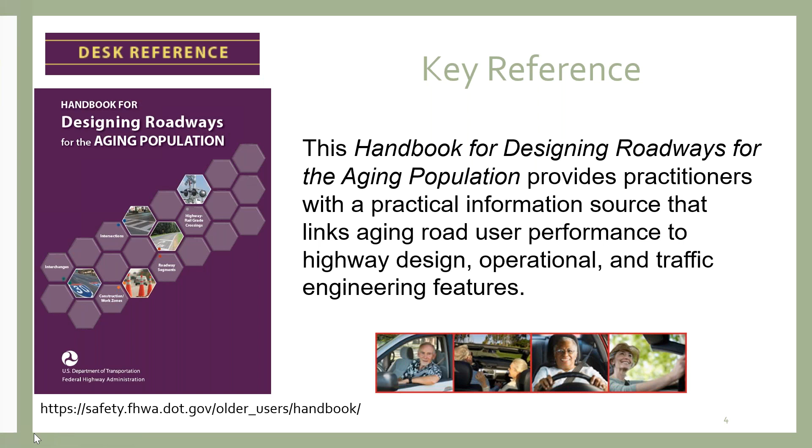Now, why the attention focused on older users? Well, we are an aging population. You may have heard the term the gray tsunami - demographically, the numbers and percentages of older people in America will continue to increase. The number of Americans age 65 and older is projected to double by 2060. So if you think about the older user, or what would be a representative user of our system, maybe a design user, what capabilities of a typical human being are appropriate to assume for certain roadway or pedestrian design criteria.

As we age, that older user would be more appropriate to be our representative person that we design for. And this is a particular issue in Ohio.

If we look at the Ohio State Strategic Highway Safety Plan, older users is identified as one of the emphasis areas. People age 65 and older represent the fastest growing segment of drivers in Ohio as well as nationally.

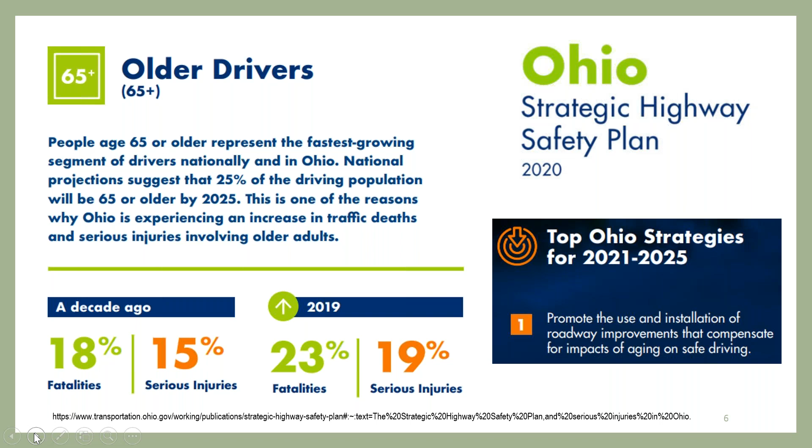So in Ohio, one of the top strategies identified in the Strategic Highway Safety Plan is to promote the use and installation of roadway improvements that compensate for impacts of aging on safe driving. That's really what this workshop is all about. We're delighted to present this workshop through Ohio LTAP to help support this strategy in Ohio's Strategic Highway Safety Plan.

So there is good news if we think about older drivers collectively. Older drivers tend to be safe drivers in terms of not demonstrating risky behavior. In other words, older drivers tend to not speed as much, tend to not be under the influence of alcohol, and tend not to be aggressive drivers.

So across the spectrum of age groups, we actually see where drivers 65 and older are best represented in terms of not being involved in crashes. In terms of driver involvement rates per 1,000 licensed drivers, the 65 and over age group has the lowest involvement in crashes. Good news.

However, the not so good news is that when older drivers are involved in a crash, the outcome tends to be more severe. Part of this is the fact that as we age and our bodies get more frail, the ability to withstand crash impacts becomes less so. The physical damage to the human body will increase as we get older.

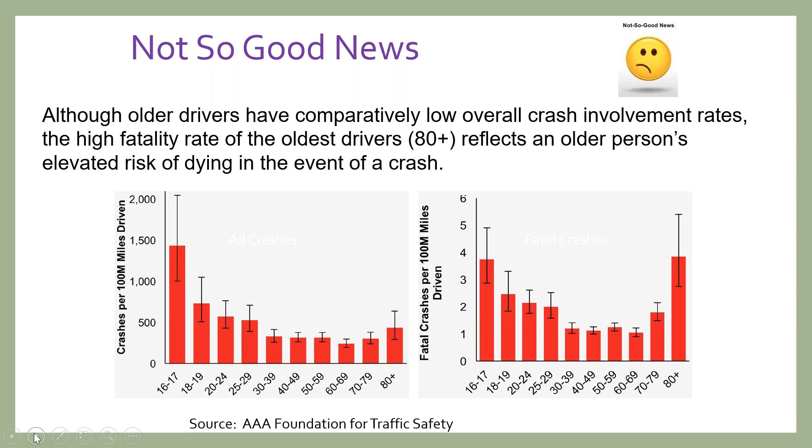So sadly, we do see fatal crashes overrepresented as we get older, especially for the 80 and above. So the good news, older drivers tend to be safer drivers. The bad news is that when older drivers are involved in a collision, the outcome will generally be more severe.

At ages 80 and above, we see that sharp increase in the fatality rate, and mostly that would be expected just because at ages 80 and above, we would tend to have more underlying health conditions. It's more difficult to recover from a serious crash the older that we get.

By 2050, that older population of say 80 and above will be nearly 3 times more than what it currently is. So not only are we aging, but very gladly, as people see more and more birthdays, it's not uncommon to see that 85th birthday and higher. Many people enjoy good health and continue to drive, but we do start to see that increase in fatalities at that older level.

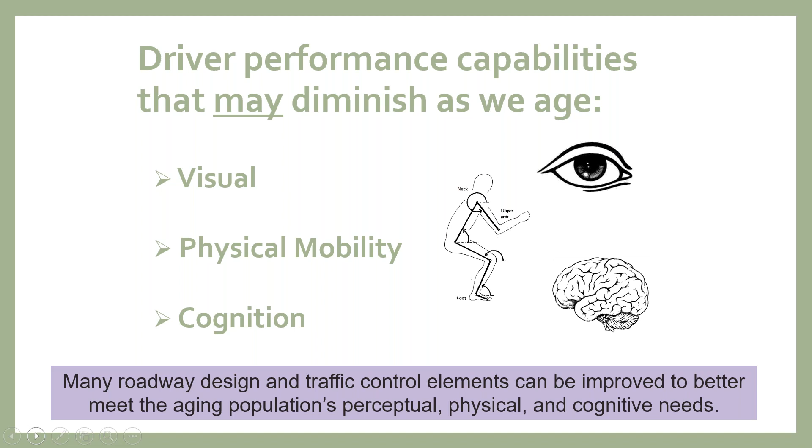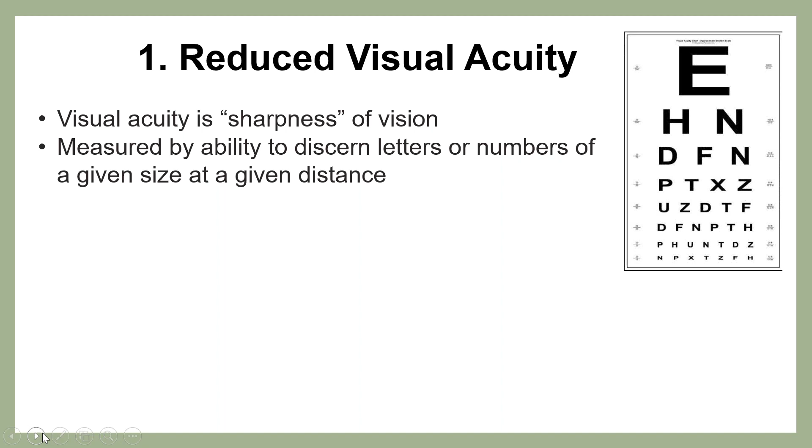Starting with visual capabilities: reduced visual acuity, reduced contrast sensitivity, reduced area of visual attention, reduced perception in motion, increased sensitivity to glare at night, and decreased dark adaptation. These are six very common visual capabilities that typically diminish with age. Visual acuity is the sharpness of vision - think about a typical eye test or an eye chart where we ask someone to discern the letters or numbers of a given size at a given distance.

Where visual acuity or reduced visual acuity comes in for us as transportation practitioners, well, the way we communicate to drivers is through signing, whether it's a warning sign, guidance sign, or regulatory sign. That's primarily how we communicate, although as we get more in-vehicle navigation systems, that helps with the guidance task. But no doubt for things like traffic control, we communicate through signing. Reduced acuity makes it more difficult for people to perceive the details on those signs, so things like larger letters and larger signs are obviously a way to help compensate.

Reduced contrast sensitivity is the ability to distinguish between objects of similar color or shading, and distinguish the object from its background. If you think about pavement markings, worn pavement markings can be problematic for someone with reduced contrast sensitivity to make out. Or think about the edge of a roadway, a curb, and identifying where the road ends and the curb begins, not wanting people to hit the curb, plus issues with shadowing. If we have trees that create shadowing effects, it can make it more difficult to identify the edge of a curb. Reduced contrast sensitivity can also make things seem fuzzy or ill-defined.

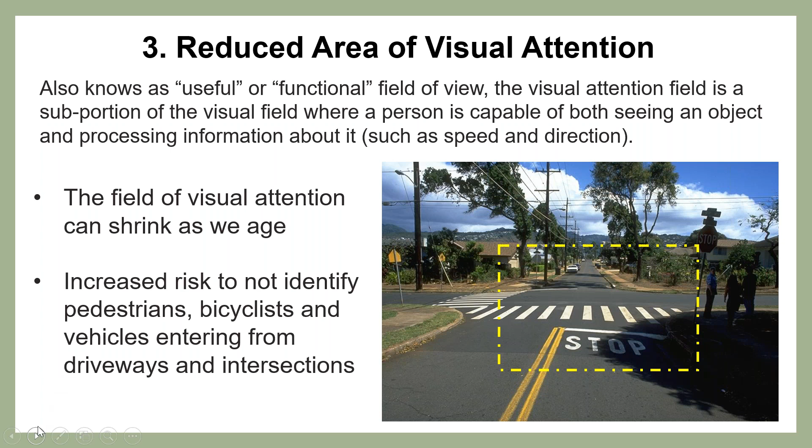If you think about perceiving a pedestrian on the side of the road, perceiving that there is motion, that the person is actually moving, that field starts to narrow down. Also, the cone of vision we need to actually see detail, like reading a sign, is an even narrower cone, and that also diminishes over time. So as drivers, the full horizontal view, that 180 degrees of peripheral vision, isn't very useful to us in the driving task. Actually, it's the useful field of view that is where we could pick up motion, such as a pedestrian. Then the accurate vision field of view is where we would have to focus our eyes to read a sign, and that is a very narrow field of view.

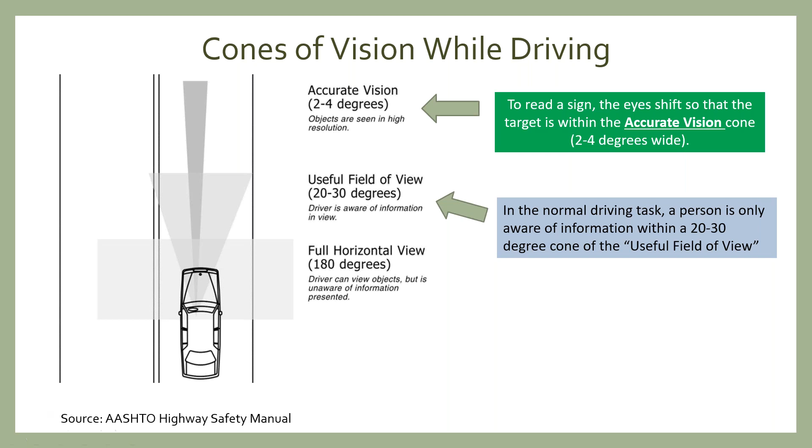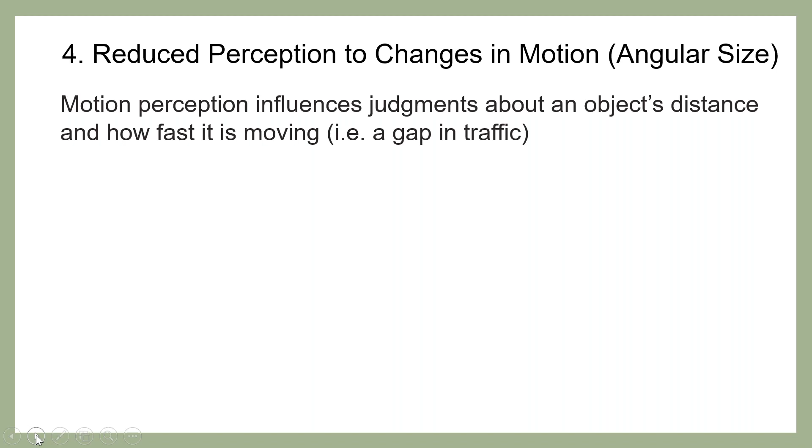When we are focusing our attention to read a sign, we tend to lose what we are capable of perceiving, even within the useful field of view. If we're concentrating on reading a sign, the other things around us, like maybe a pedestrian or a bicyclist, become harder to notice, especially as we age, since these cones of vision start to diminish. Motion perception is our ability to judge, and this is typical if we think of being at a stop-controlled intersection waiting for a gap in oncoming traffic, maybe making a left turn from a minor street or coming out from a driveway. We have to make a judgment about the speed and distance of that approaching vehicle, to decide whether there's an appropriate gap to make the left turn or crossing maneuver.

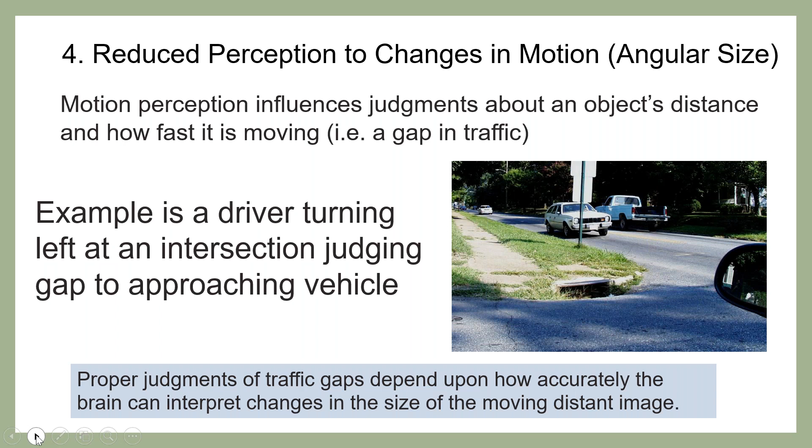That judgment and gap really is based upon our brain's ability to interpret a moving vehicle. We do that by the perceived difference in size, the vehicle appears to get bigger the closer it gets. This is applicable to all ages, not just older drivers. It's a challenge even for younger drivers because we don't perceive much difference in the size of the vehicle until it gets very close to us. From 1,000 feet to 500 feet, that vehicle image size doesn't get much larger. Then at less than 500 feet, we start to notice the image appears bigger, and that allows us to judge its relative proximity to us.

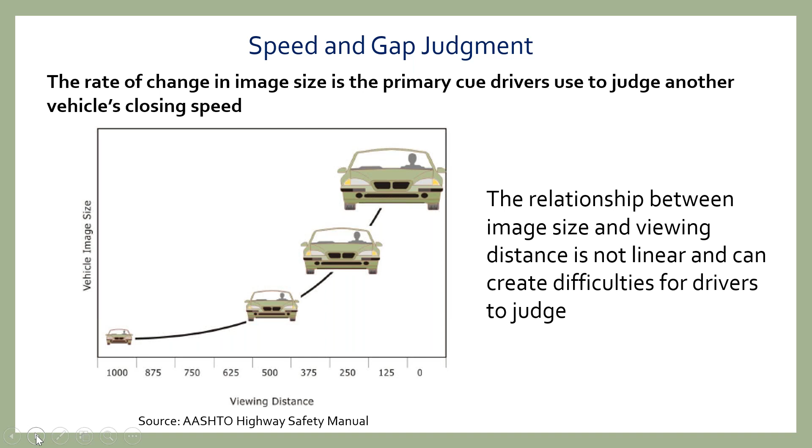As we age, that ability to distinguish those slight differences in image size becomes even more challenging. There's also increased sensitivity to glare at night, especially in the rain, from headlights of oncoming traffic, and our eyes need more time to recover from that interference with our focal vision. The sixth visual ability that diminishes is moving from light to darkness. Our eyes, the retina, need time to adapt to the change in lighting condition, and that ability to adapt also diminishes with age.

So those are six examples of things that diminish with age. When we do this workshop live and in person, one of the activities I like to walk through is this one. We'll do a little activity individually. I'm not going to pull up a poll pod, but I'd like you to think for a moment.

We've got a list of various safety enhancements that are very typical: putting in roadway lighting, implementing a protected-only traffic signal phase, using larger signs, larger letters, high quality reflective pavement markings, overhead mounted lane assignment signs, no right turn on red, and signal backplates with retroreflective borders. These are things we commonly do.

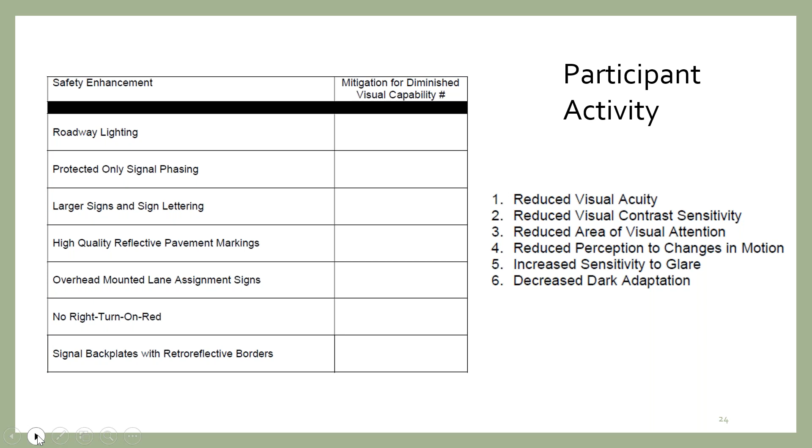Now I want you to think about how those safety enhancements might help compensate for one or more of the six visual capabilities that are diminished. If we went through this as an exercise, you'd see that sometimes multiple capabilities are mitigated by these various safety enhancements.

So a lot of these common things we do help compensate for the diminished visual abilities that are normal with the aging process. There are some physical mobility capabilities that also diminish. We tend to lose strength and range of motion in our shoulders and legs, affecting our ability to turn a steering wheel and apply the brake in a rapid manner, or reduced head and neck or upper torso flexibility.

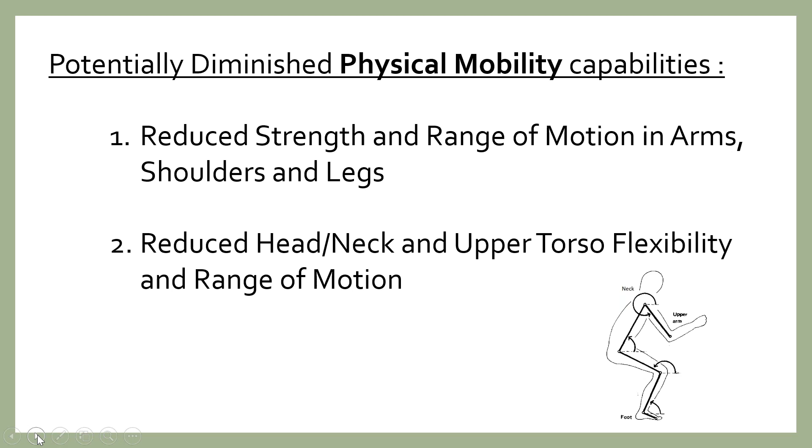At an intersection, perhaps our ability to turn our neck to judge a gap in oncoming traffic, or to make a right turn on red, is affected. We commonly have to turn our neck or upper body, torso, in the driving act, and that can become more challenging as we age. So the ability to make turns, use the steering wheel, or shift the foot from accelerator to brake, or apply appropriate pressure to the brake, these are all things influenced by reduced strength.

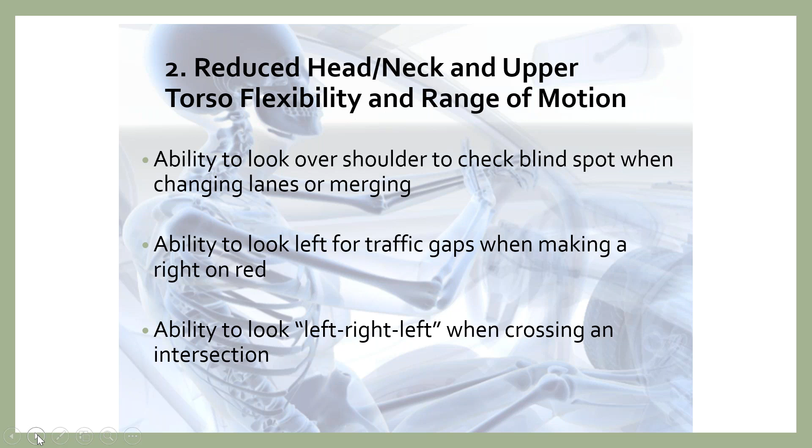For head and neck upper mobility, looking over the shoulder to check blind spots, looking for gaps in traffic, and pulling out of an intersection - the look left, right, left - or as a pedestrian crossing the street, same thing, to judge gaps to cross the street.

One of the things I really miss about not doing this workshop in person is an activity we'd do at this point to help participants better understand those diminishing abilities. We would sometimes pass out neck braces to represent that loss in upper torso mobility, and hand out glasses to mimic things like reduced visual acuity or contrast sensitivity. There are filters that can replicate conditions like various sight issues, something as simple as blurring or clouding of the eyes.

So just wanted you to take a moment to better appreciate why older drivers sometimes behave the way they do. Sometimes it's explained by these reduced physical and visual abilities. There are cognitive abilities as well: diminished selective attention, increased perception and reaction time, and diminished working memory skills. Selective attention, especially at intersections in the driving task, requires us to pay attention to a lot of different things.

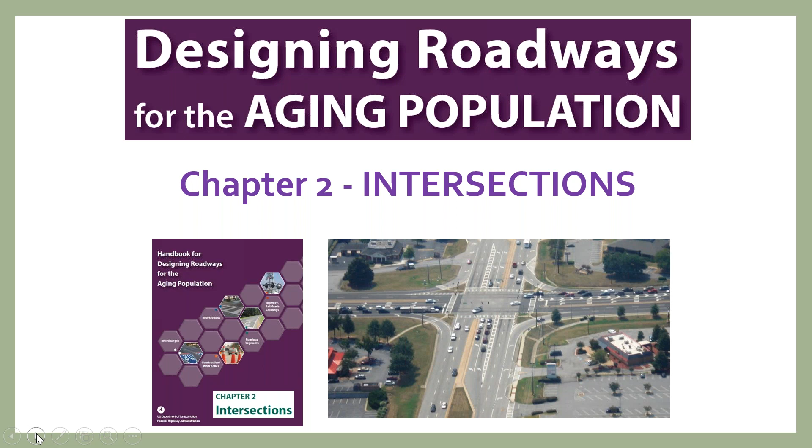So let's dive into the FHWA handbook. Intersections represent a big chunk of what is in the handbook, because intersections are particularly problematic or challenging for older users. So let's first try to understand why intersections are such a challenge, and then look at the potential treatments that can be used.

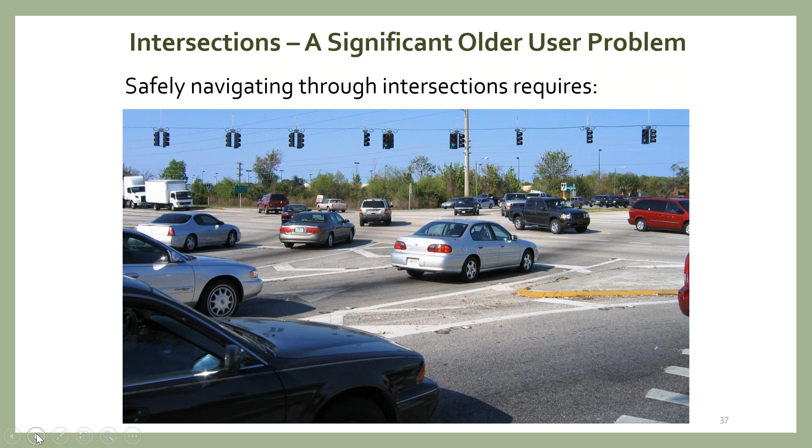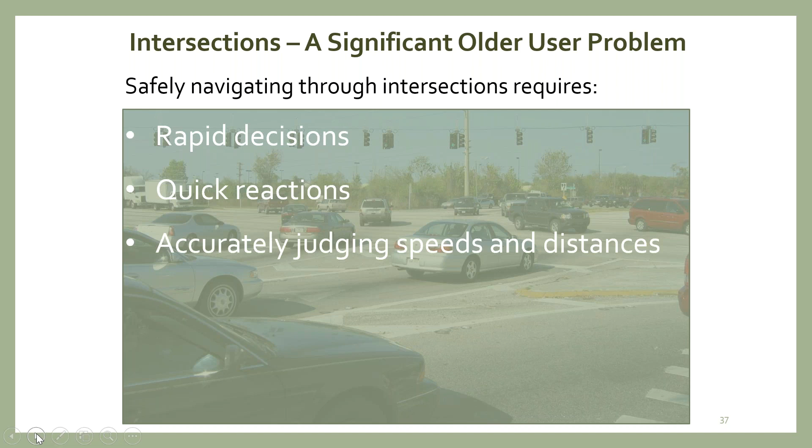Intersections are challenging for all users. They require a lot of decisions. They require us to make actions or maneuvers, and sometimes even evasive maneuvers. We have to follow traffic control devices. We have to navigate perhaps through a choice of multiple lanes, depending upon whether we're going right, left, or through, or sometimes we even have multi-legged intersections. So oftentimes we have to make rapid decisions. We have to have quick reactions. We have to make accurate judgments of speed and distance.

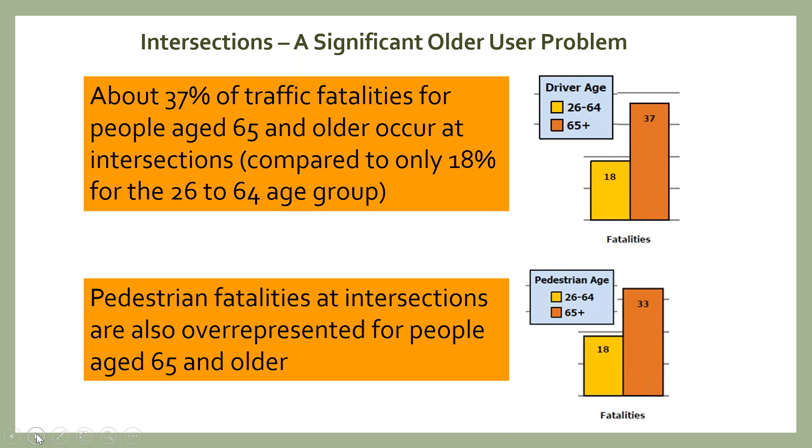And all of these are abilities that can commonly diminish with age. So if we look at the data, about 37% of traffic fatalities for people age 65 and older occur at intersections, compared to about 18% of the general population, or the under-64 group. So traffic fatalities at intersections are statistically overrepresented within the 65 and above group. And that sadly is the case for pedestrian fatalities at intersections as well—pedestrians 65 and older are overrepresented at intersections.

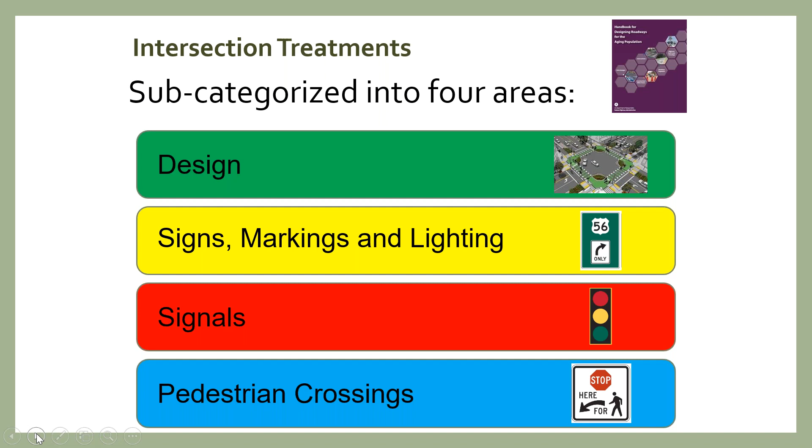So we're going to talk about treatments identified in the handbook, and I'm going to subcategorize them a little differently from how they're categorized in the FHWA handbook, but I think this is an easier way to think about them. We'll talk about design types of treatments—things that might be done as a project is developing, involving physical construction with the intersection. Then there are treatments that involve signing, marking, and lighting—things that might not need a project, that could be done at lower cost, possibly even implemented by maintenance forces. If the intersection is signalized, there are some things that can be done specific to the traffic signal operations. And the fourth category involves pedestrian crossings at intersections.

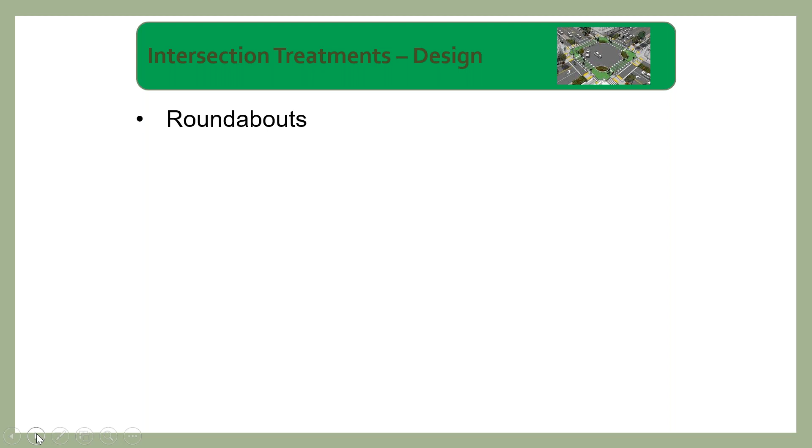The design treatments covered in the handbook are roundabouts, reduced left turn conflict intersections, minimizing the skew angle if there is one, utilizing an appropriate curb radius at the intersection, and the use of raised channelization, as well as having ample intersection sight distance for those permissive type of maneuvers.

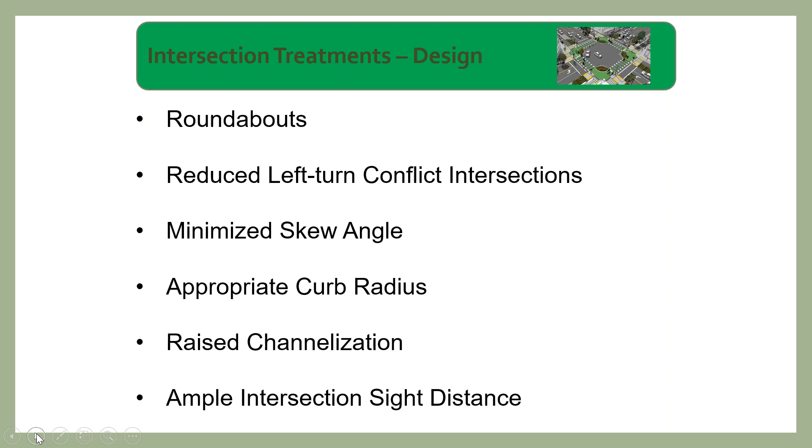So let's start off with roundabouts. The handbook does recommend that roundabouts be considered in the implementation or redesign of existing intersections. Roundabouts are very effective at eliminating those severe right angle crashes. Compared to a traffic signal or a stop-controlled intersection where someone runs a red light or blows through a stop sign, that would result in a 90-degree collision at a high speed.

Under the safe system approach, we better understand that from a kinetic energy management perspective, not only is speed part of the kinetic energy that is transferred to the body in a crash, but the angle of the impact. So for two cars colliding at an intersection, we actually have less protection from our vehicles if we're impacted on the sides.

If you think about getting hit on your driver's side door or passenger side door, there's less steel, less metal, compared to what would be absorbed by the vehicle body in a rear end collision or even a head-on collision, even though a head-on collision typically involves two vehicles at high speed. It's actually the part of the car that gives us the most absorption of kinetic energy through the front crumple zone area. So yes, it's a higher impact energy, but it's also where the vehicle gives us the most protection.

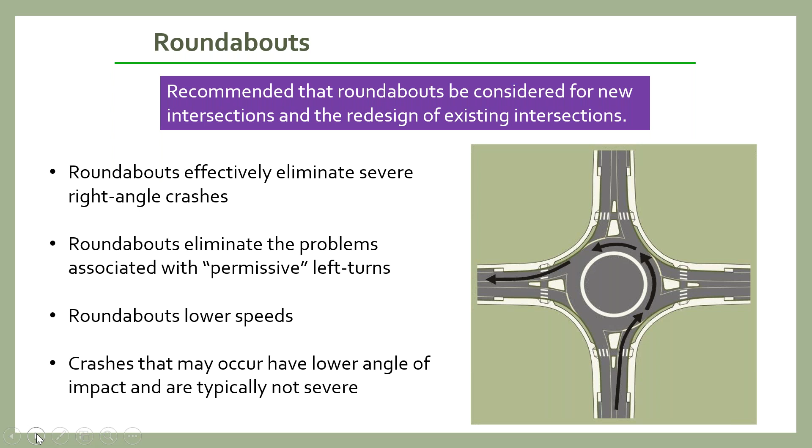Not only are all of these things consistent with the safe system approach, but they are also very consistent with how we can design and operate intersections with the older user in mind. All of these advantages are particularly advantageous to older users. For a pedestrian, the pedestrian only has to cross one direction of traffic at a time.

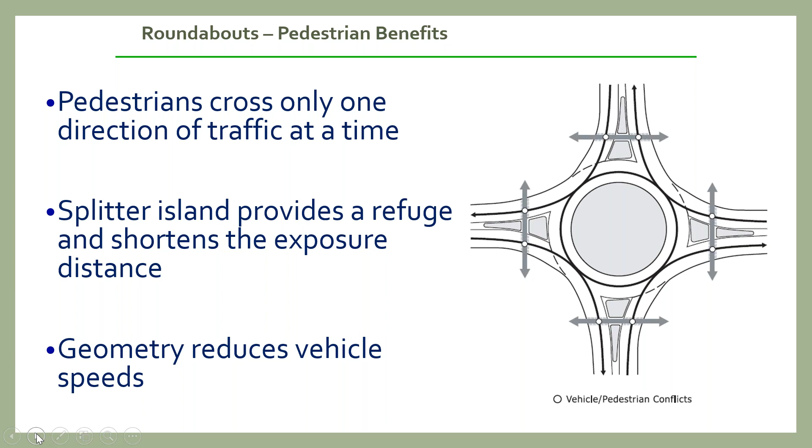The splitter island can provide a refuge and shorten the exposure distance for the pedestrian crossing. And as we mentioned, the geometry of roundabouts typically reduces vehicle speeds, increasing the likelihood of yielding to pedestrians, but also lower speeds increases the survivability of a crash if a collision occurs.

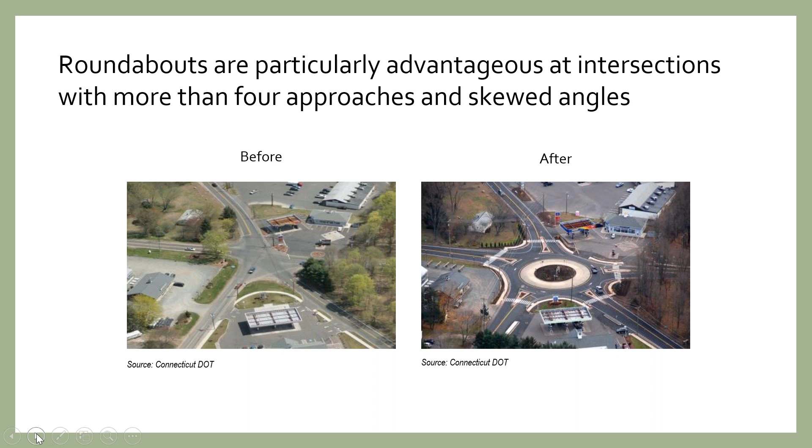Roundabouts are particularly advantageous when we've got skewed intersections or intersections with more than 4 approaches. Roundabouts are always great choices when you're trying to deal with these complex geometry type intersections.

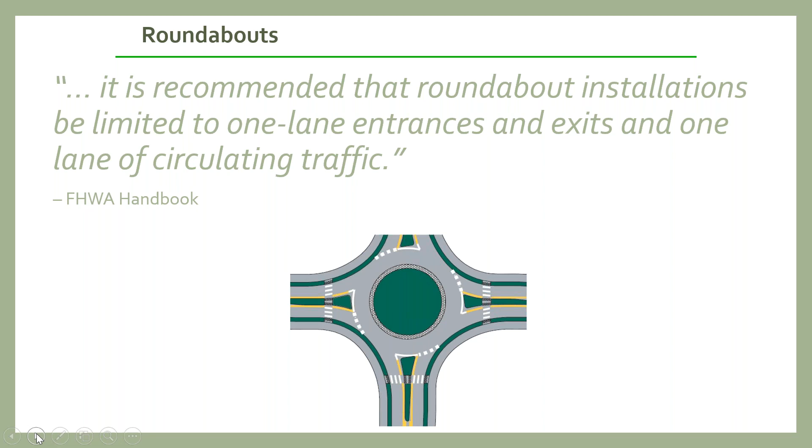Now, the handbook does have a recommendation that roundabouts be limited to single lane roundabouts, one lane entrances and one lane of circulating traffic. Well, why? What's the issue with multi-lane roundabouts? Multi-lane roundabouts are more challenging for motorists, certainly starting with the key decision of what lane should I be in.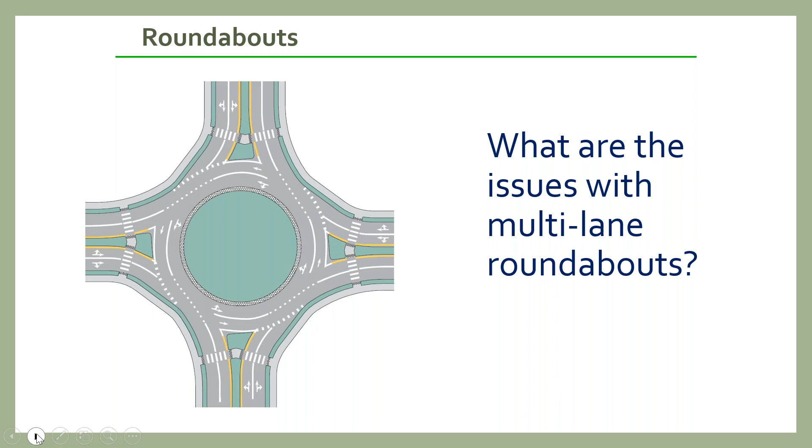If it's just a 2-lane roundabout, it's really a choice of right lane or left lane. But even with good signs, good markings, there are still some challenges that we see at multi-lane roundabouts that we don't see at single lane roundabouts. We've basically opened up an opportunity with multi-lane roundabouts for more errors to occur.

Things like on entry to a multi-lane roundabout, the entering driver needs to yield to both lanes. And sometimes, especially when the entry approach and the exit leg of the roundabout have a larger separation distance between the entry and the exit, it can be confusing that the driver in that inside lane, say the left lane in the circulating roadway, may be exiting.

And for most 2-lane roundabouts, it is very common where the 2 through lanes are permitted to make the through maneuver. A left turn made from the left lane, right turn made from the right lane, but very commonly the 2 lanes allow for the through movement. So that white car in the figure there on the left may be making that through movement, maybe they entered from the top approach, and the yellow vehicle is not yielding to both lanes. So we see those types of problems, not yielding to both lanes.

We also see on entry, and the geometry of the roundabout may or may not contribute to this, but the appropriate entering path - a vehicle in the right lane on the entry should enter the circulatory roadway in the proper receiving lane, but sometimes drivers cut into the improper lane of a multi-lane roundabout, failing to maintain lane position. Or people make an improper maneuver in the circulating roadway, say, for example, a driver that is essentially making a left turn, but doing so from the right lane of the multi-lane roundabout - an improper left turn.

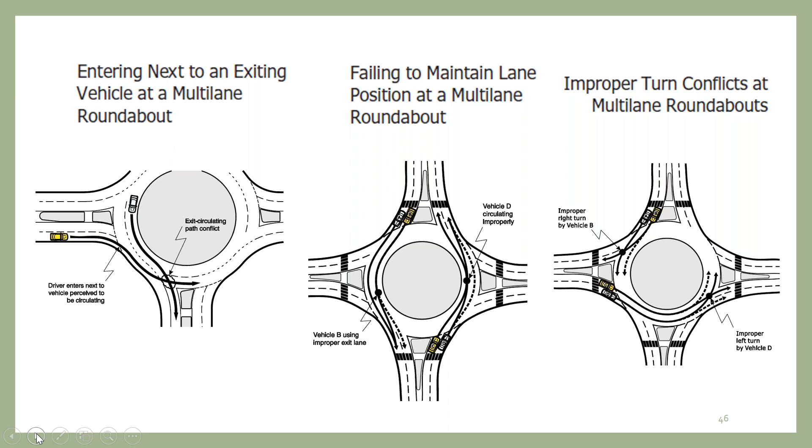So that recommendation is in the handbook, but I don't want to be too negative or discouraging about multi-lane roundabouts. Yes, multi-lane roundabouts have these potential challenges, these crashes can occur, but the good news is they tend to be less severe.

And there are things that are emerging with multi-lane roundabouts: the spiral design, turbo roundabouts that introduce a raised feature separating the lane lines in a multi-lane roundabout. These are emerging things on multi-lane roundabouts that may actually help improve safety performance down the road for multi-laners.

So with roundabouts, I guess the rule of thumb is less is better in terms of number of lanes. Fewer lanes generally means better safety performance. So when designing roundabouts, think in terms of if we don't need the extra capacity right away, maybe we're designing for a future condition, making the roundabout expandable in the future, but opening it up and operating it based upon your current needs.

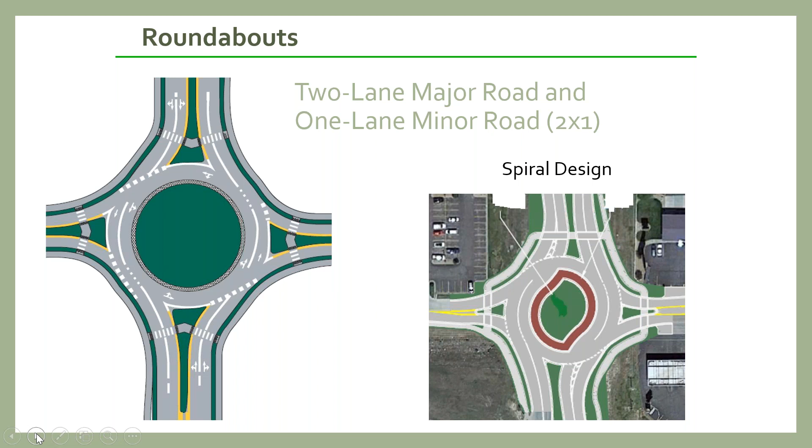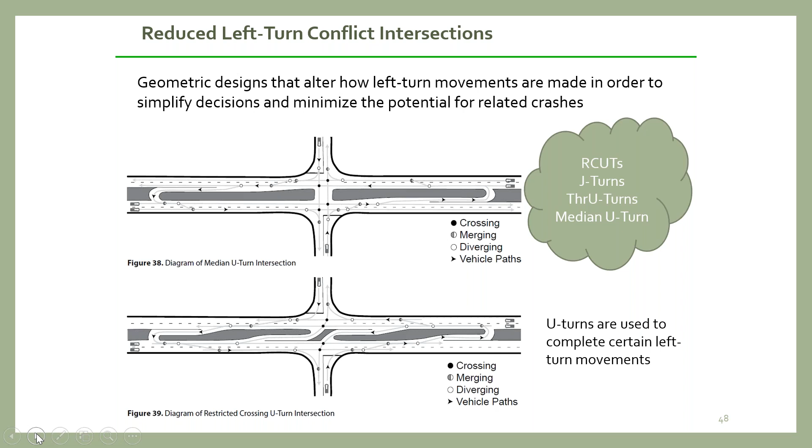So roundabouts, reduced left turn conflict intersections, the other geometry - these are things like the restricted crossing U-turn intersections, the median U-turns. They basically redirect left turn movements at the main intersection. We talked about the problems of left turn maneuvers. Well, these are also ways to help mitigate those left turn problems.

If we think about a traditional open median type intersection, especially in a rural area on a divided highway where the major road does not stop and the minor road has stop control, it's inevitably those far side angle collisions that we see as the problem on these types of rural intersections.

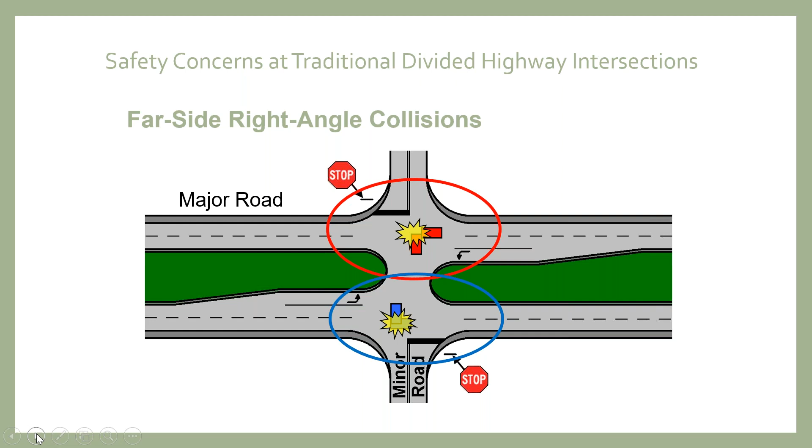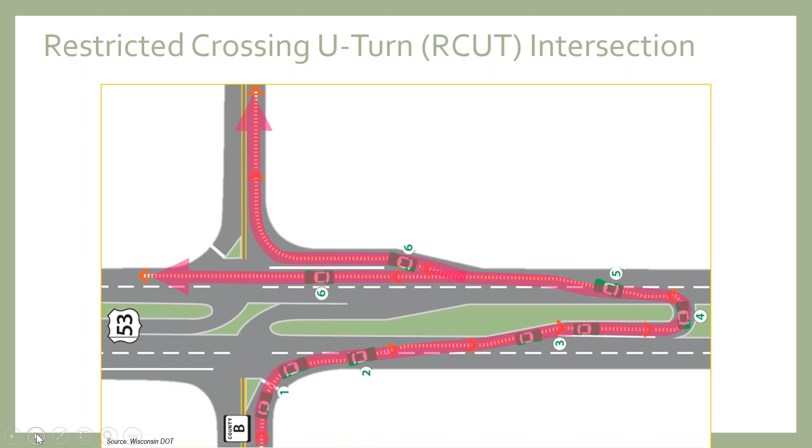As motorists, we do a better job of judging gaps on the near side, less so on the far side. That's where the restricted crossing U-turn, also known as a J-turn, comes into play. Traffic coming out of the minor street makes a right turn, goes to the downstream location, makes a U-turn, and if they wanted to make the left or crossing maneuver, they do so by continuing straight or making the right turn. It basically breaks up the decision points, making it easier to judge gaps or view oncoming traffic one direction at a time, making one decision at a time.

Things like the restricted crossing U-turn can be particularly advantageous to the aging population. For RCUTs and median U-turns, the Federal Highway Administration has some great informational guides available from our FHWA intersections webpage on these reduced left turn conflict intersections.

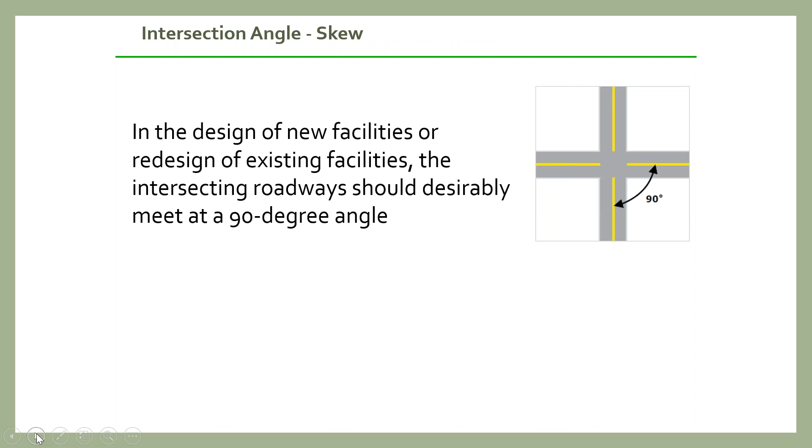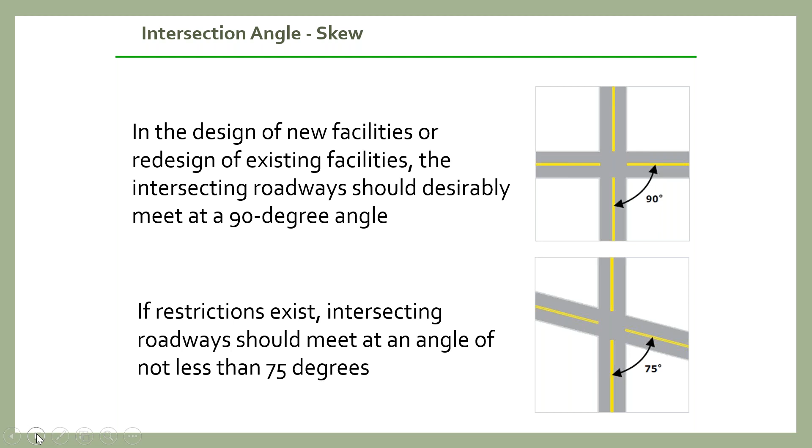For skew angle, most intersections have a 90-degree crossing, but not all intersections have that. Sometimes we have a skew, and that skew can be problematic. Typically, if that angle becomes less than 75 degrees, 90 degrees being the ideal, that's when the skew can be problematic.

The skew angle can necessitate greater neck turning in order to judge traffic coming from the left direction. It may increase the length of a crosswalk, making it more difficult for a pedestrian to cross. It may also reduce the ability of a pedestrian to see drivers, especially drivers that may be looking the other way for a gap in traffic.

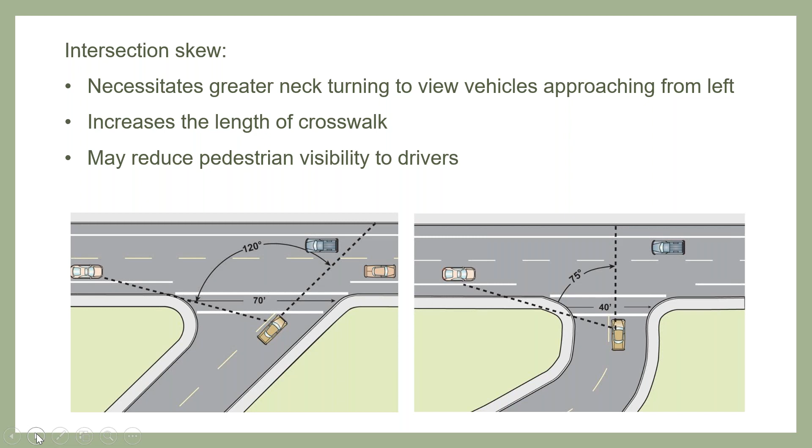So this would be, say, a stop-controlled minor intersection. That skew angle does have a direct influence on what could be called the head turn angle - what would be required of a driver to look to their left, over their shoulder, to see approaching traffic. When the intersection skew angle is less than 75 degrees, that's when the head turn angle would start to approach 140 degrees.

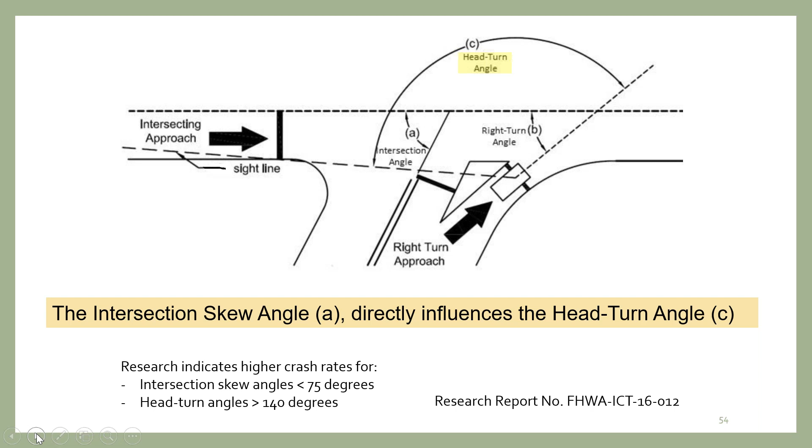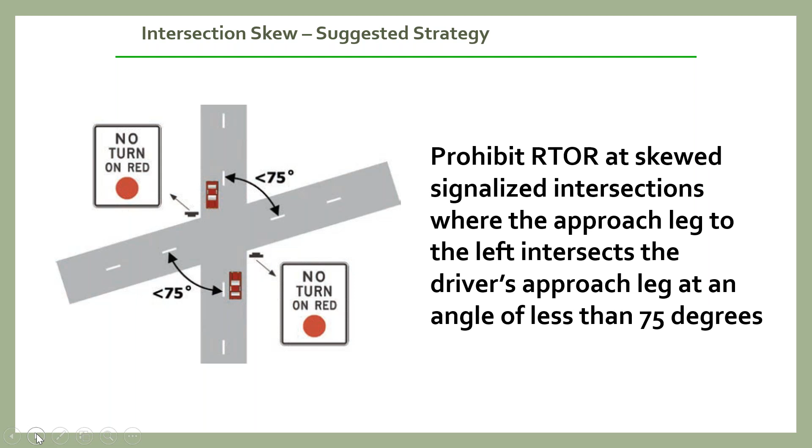That can be particularly challenging. So some things can be done if we can't eliminate the skew, and obviously a lot of existing intersections have skew, so you're probably not going to have an opportunity to change the geometry. Things like eliminating the turn on red at a signalized intersection - make it a no right turn on red.

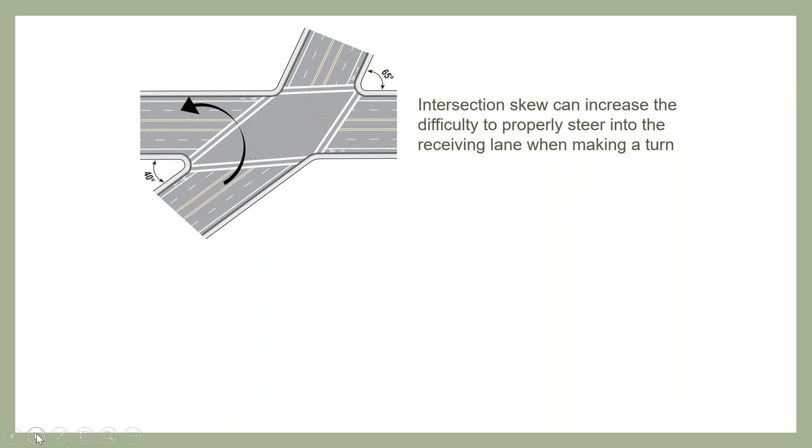Another challenge of a skewed intersection is for drivers making a turn. In this illustration, you can imagine how difficult it might be to make that left turn - it's a hard steering maneuver to make at the intersection. One of the recommendations in the FHWA handbook talks about increasing the receiving lane width, the throat width basically, of the receiving lane. This would be particularly applicable when we have a hard skew angle like this.

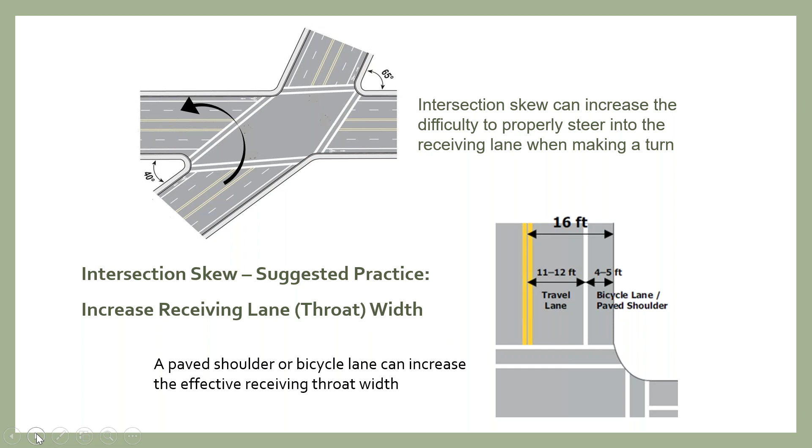Now, say it's a signalized intersection - when the driver is making that left turn, there would not be a bicyclist in the bicycle lane, but that bicycle lane could effectively be a way of increasing the receiving throat width for that left turn. But even if there's not a bike lane, sometimes just adding to the lane width for the receiving lane at a badly skewed intersection helps.

And curb radius - especially in both urban and rural areas, it's a trade-off that we make at intersections with the design of the curb radius. Obviously, to facilitate the swept path of a vehicle, especially a larger vehicle like a truck or a bus, but to do so in consideration of the effect of the curb radius on pedestrians and also turning speeds, because there's an advantage for keeping vehicular turning speeds, right turning speeds, lower.

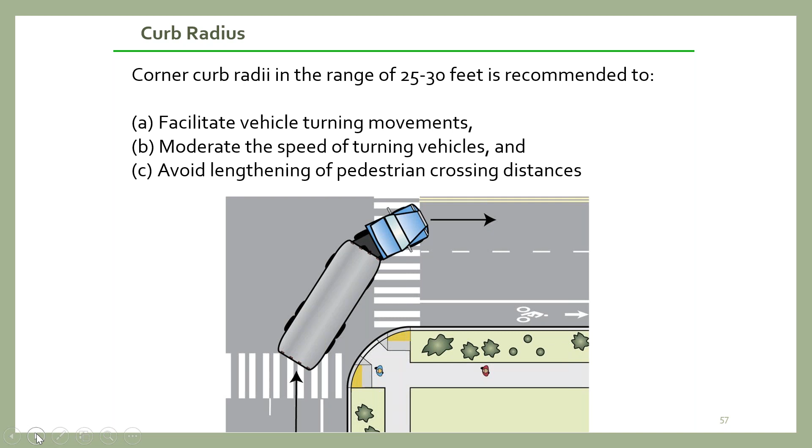So getting the appropriate curb radius really is an important engineering exercise. It's not necessarily a one-size-fits-all approach, but sometimes just a little difference in the curb radius can have a significant difference in terms of the pedestrian crossing distance, and that equates to pedestrian crossing time as well, the exposure, but also the vehicle speed, the vehicle turning speed at the intersection.

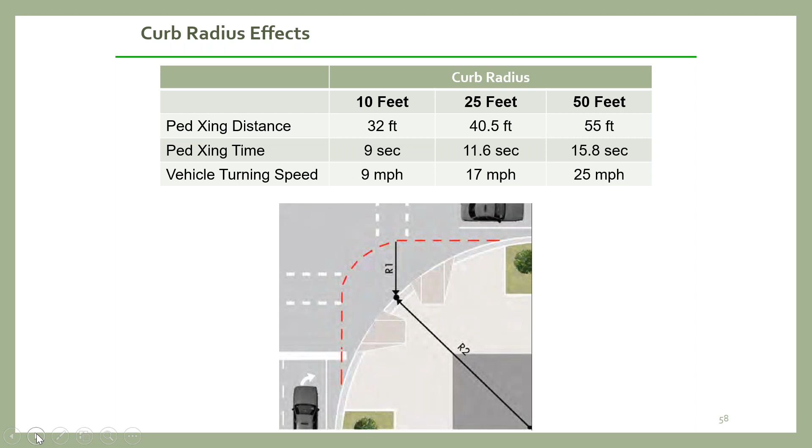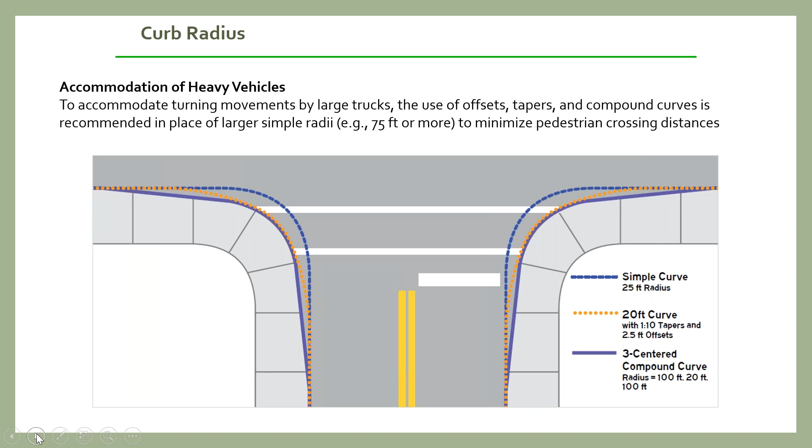So there's a risk in over-accommodating for the needs of a larger vehicle, especially if those larger vehicles are very infrequent. But having a curb radius that allows for shorter pedestrian crossing distances and slower turning speeds has an advantage to pedestrians. So paying attention to the details, and perhaps even things like a compound curve or a three-centered curve, to try to accommodate the needs of turning vehicles, but also without being detrimental to keeping crosswalk lengths short and turning speeds slow.

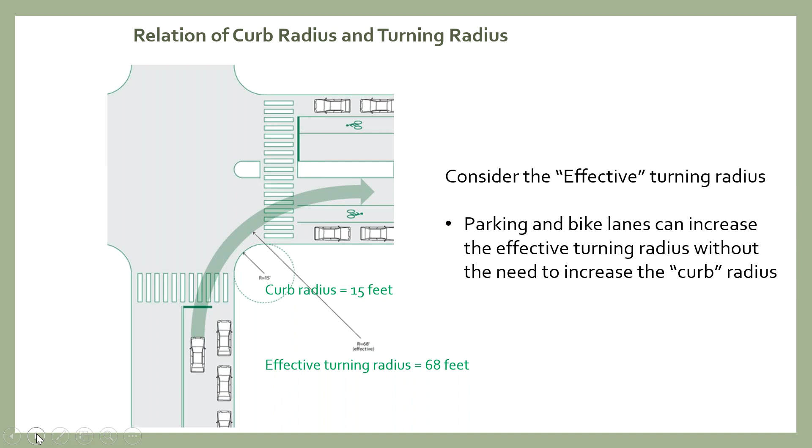There is guidance out there on modern designs. For designers, it's important to recognize the difference between the curb radius and the effective turning radius. In an urban context, on-street parking or bike lanes can help facilitate a larger effective turning radius to accommodate buses or trucks, while keeping the curb radius appropriate so crosswalks aren't longer than they need to be and turning speeds aren't faster than necessary.

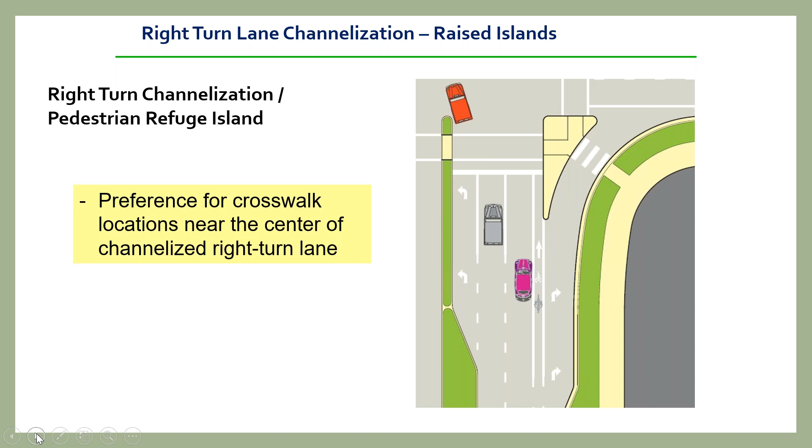Related to this is right turn channelization. The handbook discusses the preference for locating a crosswalk where it is visible to approaching traffic, while also slowing that traffic so the right turn maneuver isn't fast, but at an appropriate speed for turning.

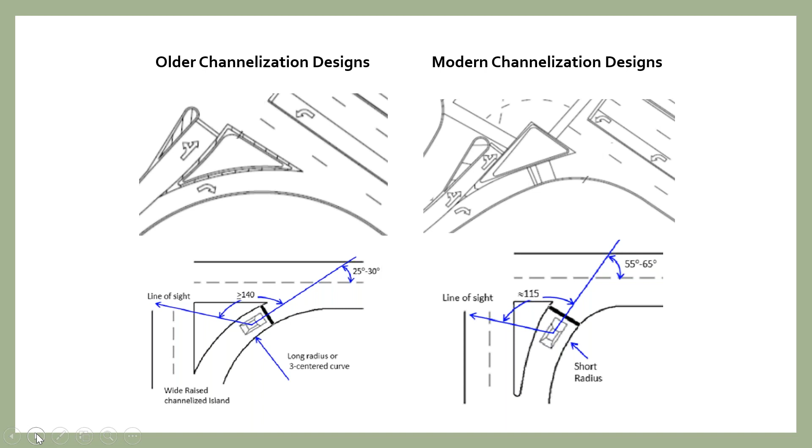The general trend in modern designs is to reduce that radius and create a slower right turn path. This also has the positive effect of reducing the look-back angle, which we mentioned is a very important consideration for older users.

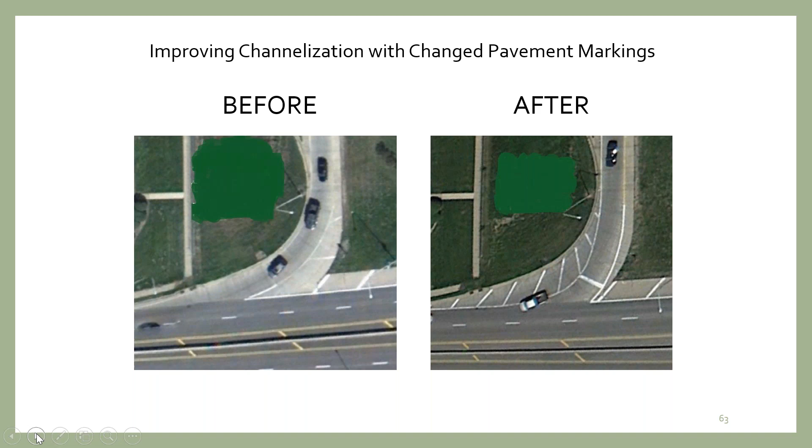Sometimes we can make these subtle changes without needing to reconstruct. Here's a good example of a before and after condition where the change was made essentially through striping, revising the pavement markings to replicate the better channelization with a reduced angle.

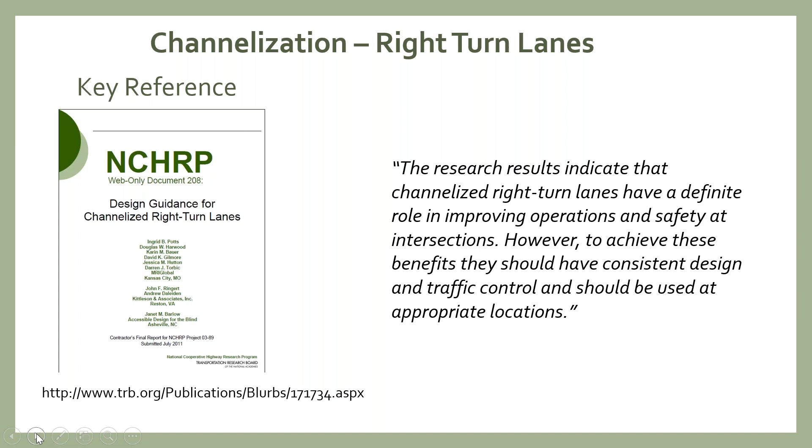For right turn channelization, there's great guidance available for free through the National Cooperative Highway Research Program, Web Document 208, Design Guidance for Channelized Right Turn Lanes. It's a very important engineering detail—it may seem minor, but it's not. It's one of those ways in intersection design where engineers can really practice their craft and come up with an appropriate design that meets the needs of all users.

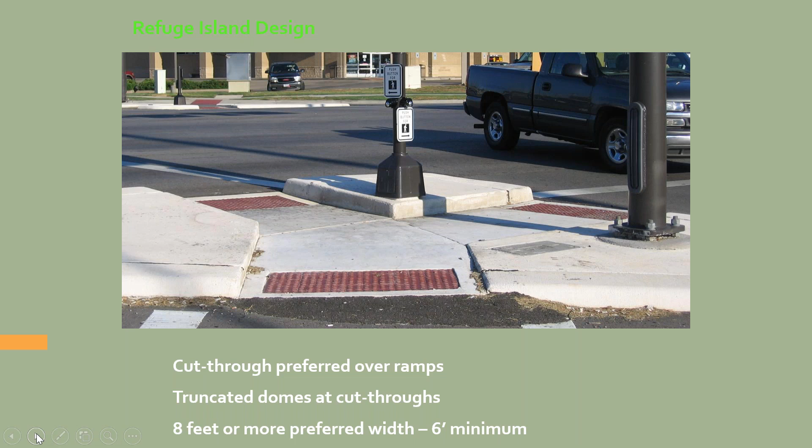Refuge islands also offer choices. The cut-through can be very advantageous, especially for visually impaired pedestrians who can use the raised features to help navigate through the refuge island. Here you see a good photo illustration with accessible features, the truncated domes at the cut-through. So right turn channelization is addressed in the handbook.

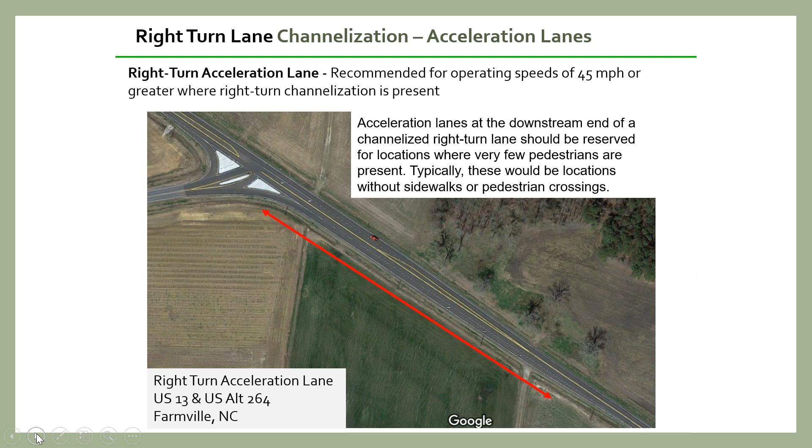This helps allow the right-turning driver to use an acceleration lane, so instead of making a judgment in oncoming traffic from a stop condition, they're accelerating. Use of the side view mirrors can kick in to help make a judgment for essentially a lane change maneuver.

Median and left turn channelization: the handbook makes a preference for raised channelization as opposed to a center painted buffer or a two-way left turn lane, especially when traffic volumes on the roadway exceed 20,000 vehicles a day. This is consistent with recommendations in access management guidance as well—the Transportation Research Board's Access Management Manual has a similar recommendation for when traffic volumes exceed that 20,000 level, favoring raised medians over center two-way left turn lanes.

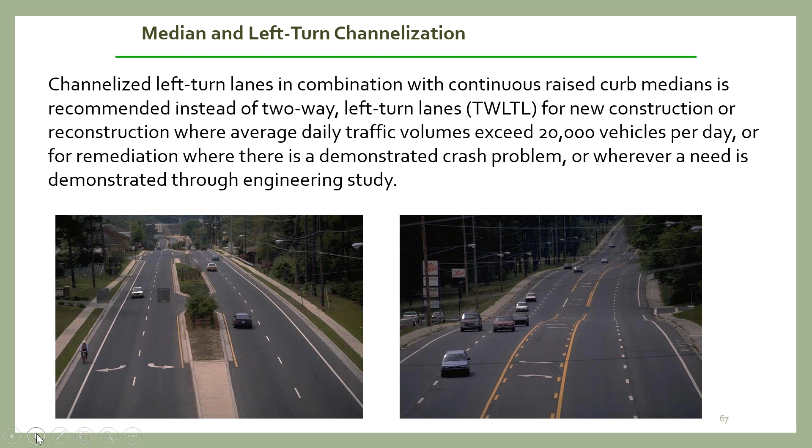Arguably there's more to it than just traffic volume. The number of driveways and conflict points can also be an important factor, and a raised median better helps reduce the conflicts from multiple driveways along a corridor.

For this channelization, the handbook recommends a sloping curb style as opposed to a vertical curb style. Think about a driver's tires—if you've ever hit a vertical curb at higher speed, it can actually pull the tire off the rim. A sloping curb is a little more forgiving.

Now, vertical curbs are not for median and channelization islands. They're appropriate for things like a downtown condition with on-street parking, so vehicles aren't able to pop up onto a sidewalk. But the sloping curb is a more forgiving design if it's inadvertently hit by a car's tire.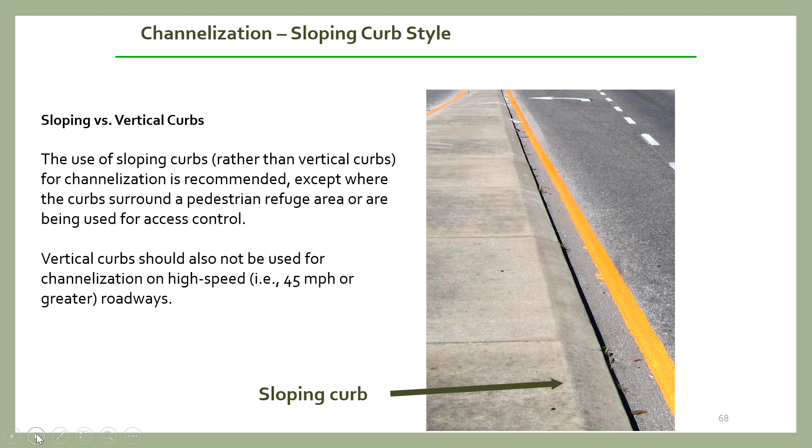And intersection sight distance—the handbook makes recommendations consistent with our design guidance, things like what is in the AASHTO Green Book for geometric design.

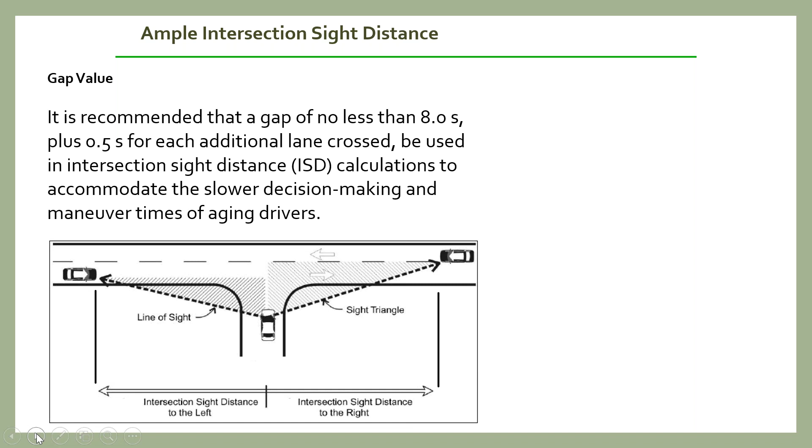And it is based upon a gap acceptance distance, but providing ample intersection sight distance to allow for those judgments for gaps. Now, oftentimes, especially for existing intersections, we find that those desirable design values for intersection sight distance may not match what real world conditions actually provide.

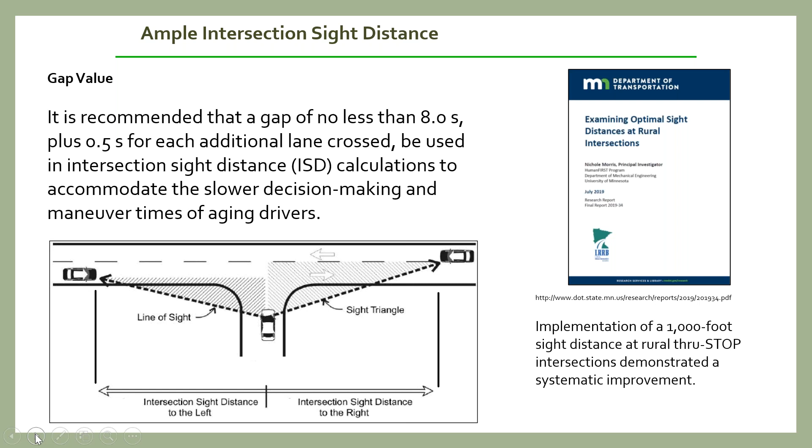There was a really good research paper that came out a couple of years back from Minnesota that looked at sight distance, especially at rural intersections. And what it really found is even if you cannot get the full intersection sight distance values, having at least 1,000 feet of sight distance at a rural location where the minor street is stop controlled, and trying to do that systemically, there's a real benefit. The study found a good safety benefit in doing so.

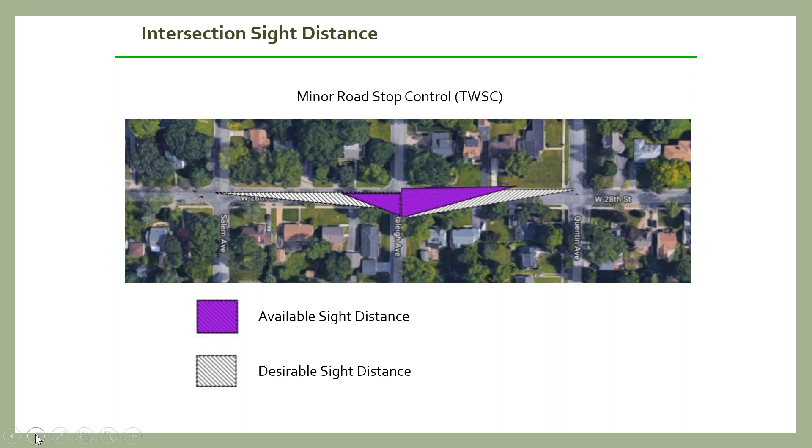So just to acknowledge that, yes, there's the desirable sight distance or the design value of sight distance, and then there's what's actually available. Sometimes for existing locations, trying to increase the available sight distance, even if it doesn't get us up to the full desirable, there's still a safety advantage to doing that. Sometimes it's as simple as vegetation clearing to increase those sight triangles.

Offset left turn lanes are another geometric feature. If you think about an intersection that involves permissive left turns, it could be a signalized intersection where the left turn could be made on a flashing yellow arrow or a green ball, and the driver making the left turn has to make a judgment for a gap in oncoming traffic. Or it could be a minor street stop controlled intersection, so the main street doesn't have a signal. The minor road may have a stop control, but the same condition occurs for the left turn maneuver on the major street. The driver has to make a judgment for a gap in oncoming traffic.

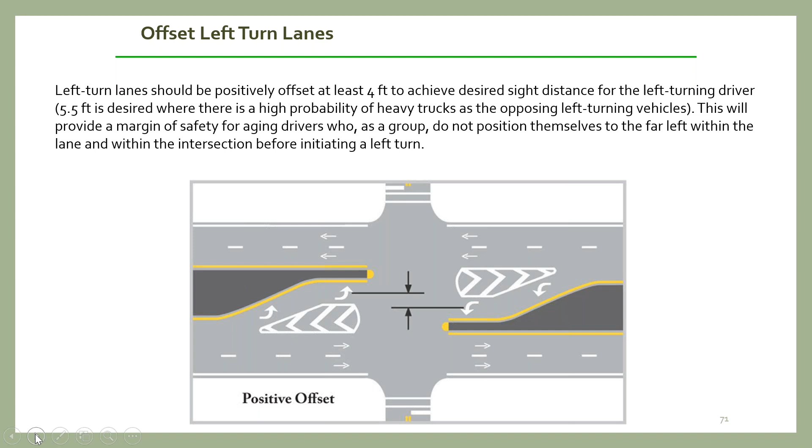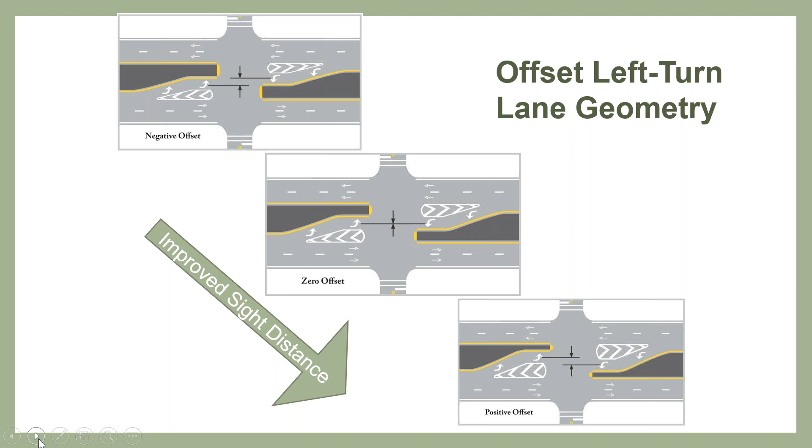We want to be able to see oncoming traffic, and that's where having a positive offset between the left turn lanes is particularly advantageous. We have more sight distance if we don't have the obstruction of a vehicle in the opposing left turn lane directly across from us. So we try to provide that positive offset.

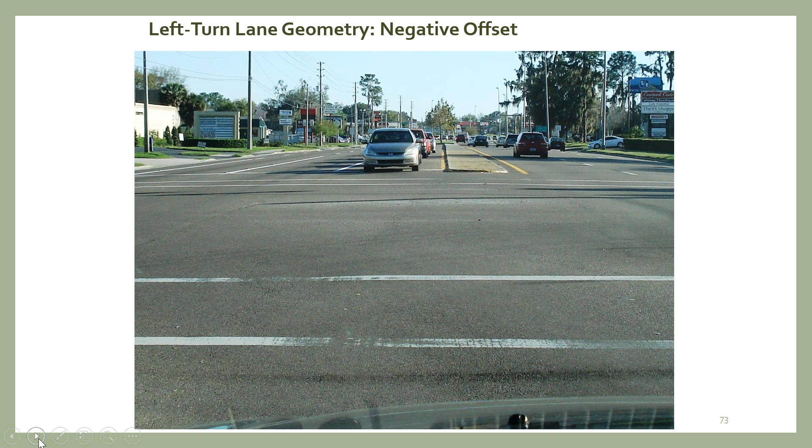Here's an example. Imagine you're the driver wanting to make a left turn. Here's what you see: there is a vehicle in the opposing left turn lane, and that driver is also waiting to have a gap in oncoming traffic to make the left turn. Well, the vehicles in the opposite left turn lane are obviously blocking our view. Maybe by the time we can see a vehicle approaching, and maybe they're approaching at high speeds on a 45-mile-an-hour roadway or even higher, there's just not a lot of time. Once you make that left turn maneuver, you may be committed without being able to see adequately that oncoming driver. That's where positive offset really can help.

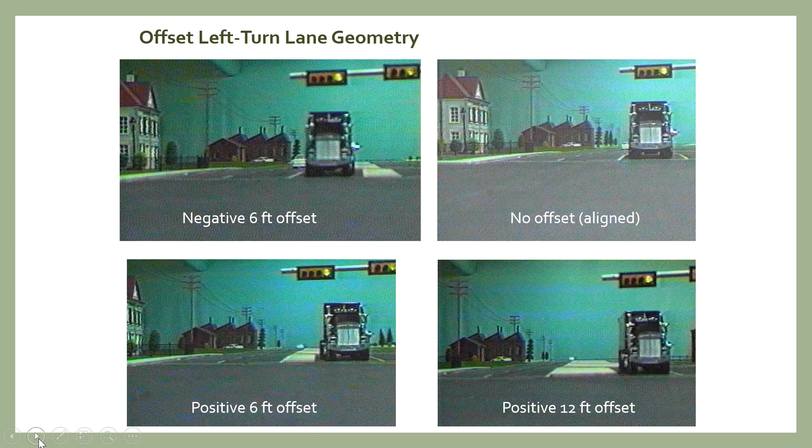But the handbook does give us recommended guidance for what those positive offset values would be. It also makes a distinction between whether it would be an opposing car in the left turn lane or an opposing truck. We may want to use the opposing truck value if we have a high percentage of trucks at the intersection, especially making the left turn maneuver. This is really good guidance found in the handbook, and it's based upon the design speed of the major road. Again, it's very applicable when we have a permissive left turn condition.

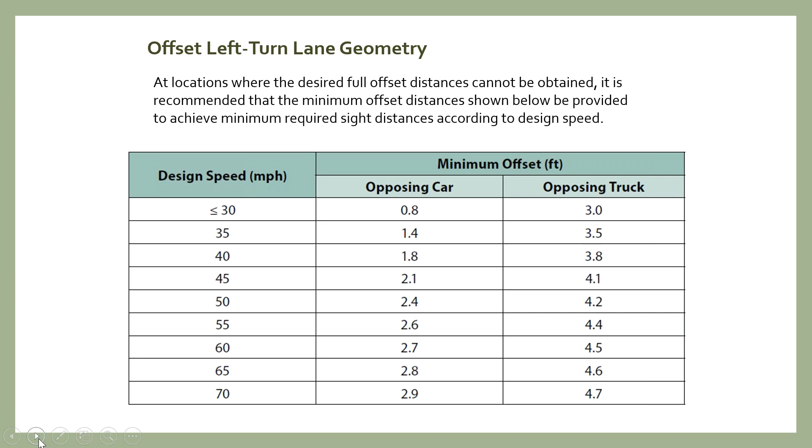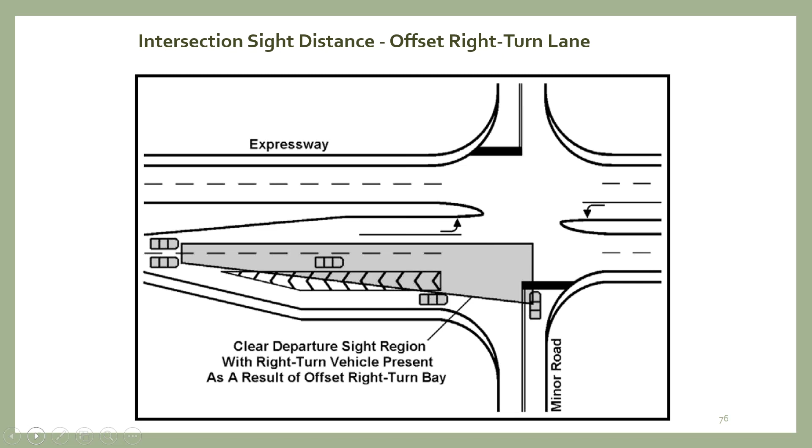There's also positive offset for the right turn maneuver. Sometimes at a rural intersection, if a vehicle is slowing down to make a right turn, that vehicle can cast a shadow over a vehicle in the left lane that is continuing straight through. So having a positive offset right turn lane helps eliminate that visibility shadow of a car slowing down to make a right turn, say, at a rural type of intersection.

So here's an example, a real world example of positive right turn offset. This is a Kentucky example.

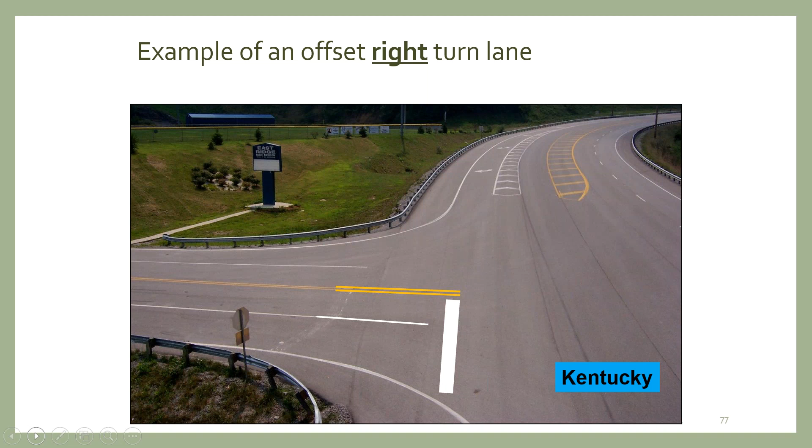Another advantage of the positive offset right turn: since the stop bar was obliterated there, you can actually move the stop bar further up, which can also help decrease the likelihood of a visibility shadow being created.

At this point, I mentioned we probably wouldn't get through all of the intersection recommendations, but let me pause and see if we have any questions. So Mike, are there any questions in the chat pod at this point about intersections?

Yes Mark, there were a lot of questions and comments regarding roundabouts. We'll combine the first two. Francis said a lot of seniors are intimidated by roundabouts. And Jay said it seems when driving a roundabout that the aging population has the most difficulty knowing how to use them. Is there data to back this up, or is it just me?

It's not just you, there's a lot of empirical feedback. When an agency proposes a roundabout, oftentimes they get pushback across all population groups. It seems like everybody hates roundabouts—you don't have to be old to hate them. But it does seem there is pushback or a dislike or distrust of roundabouts from the aging population as well. I don't know that anything shows it's hated more as you get older than by any other demographic. People just don't seem to like roundabouts, and we've learned that lesson.